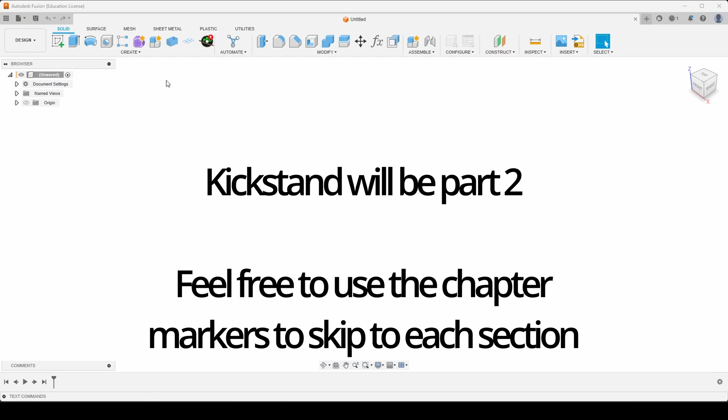Okay, let's see. Today we are going to design the base with the integrated kickstand and the sawtooth hanger and standoffs for the floating logo sign. This will be video 1, and from then you will have the base that you can save as a master file and just continue to use this base for every design that you do for the different logos.

So we've got Fusion 360 open, and we will start with the same two things you always start with. We'll go ahead and save it. I've got a floating logo sign location already set up, so I will do base tutorial, save, and I'll go ahead and create a component. Component will be the base. There will be two components. We'll have a base, and then we will have a kickstand.

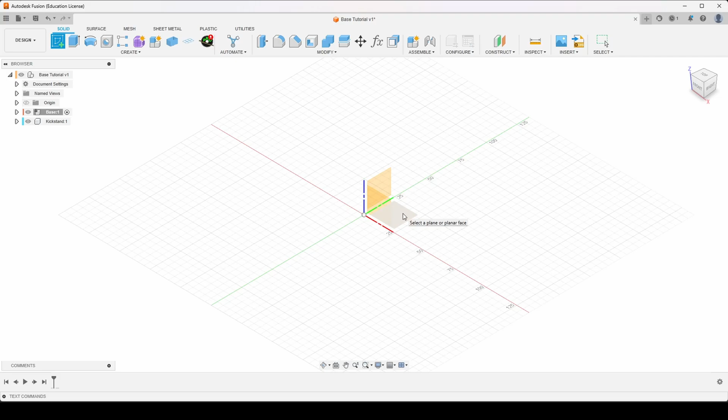All right. We'll activate the base, start from there. We'll create a new sketch on the top plane. We'll do a center rectangle. I have reassigned my shortcut R to center rectangle because I use that much more frequently. And actually, before we create any geometry, let's go ahead and set up some parameters. This is very important that we do,

so that if you have an odd size logo that needs to fit on a different size base, you can always adjust this base accordingly. And everything will be parametric. So the kickstand, the dimensions, the offsets, everything will adjust accordingly whenever you adjust the overall dimensions. So we're just going to worry about two for right now, because those are the two that you're going to adjust in the future. Everything else is going to remain the same.

We'll do base height. Right now we'll say 200 millimeters. My 3D printer bed size is 256 by 256, and I found that the 200 millimeter size for the base is a really nice standard size. And we'll do base width, 200 millimeters. Okay, so we have those parameters set up.

We'll hit OK. Again, this tutorial is presented with the idea that you already have a ground level framework of how Fusion 360 works. So it may go a little fast, but this is not a complete beginner's tutorial. You can find many of those on YouTube.

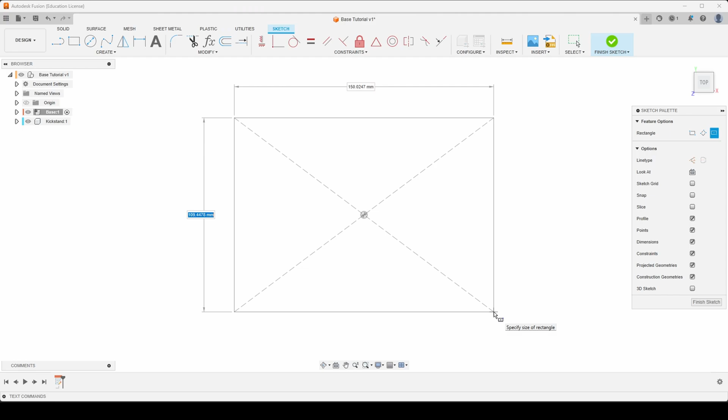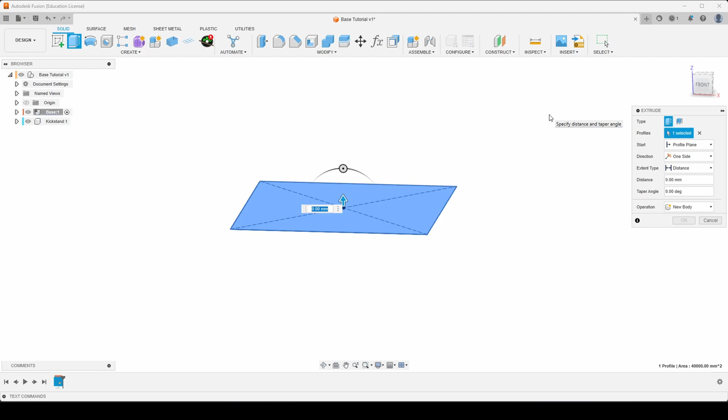So we've got the parameters set up, and again, I will hit R for rectangle, center rectangle in my case, and we will do height and tab over to width and enter. Roll out a bit, and there we go. Now we will extrude, and the base thickness is going to be 15 millimeters. Hit OK, leave that as a new body since it's already on its own component. So that is the front, and that's generally what it's going to look like.

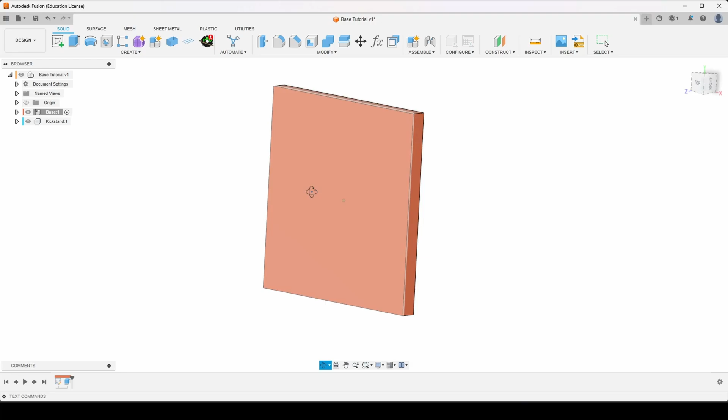Again, I've designed this before, so I'm going to go ahead and add the chamfers on the front. I always recommend that you wait to add any kind of chamfers or roundovers until the very end. But since I already have an idea of what this design looks like, I'm just going to go ahead and do it. So we'll hit chamfer. We'll just select this face, and that will chamfer all 4 edges. And that chamfer is going to be 6 millimeters. Right. So that's good.

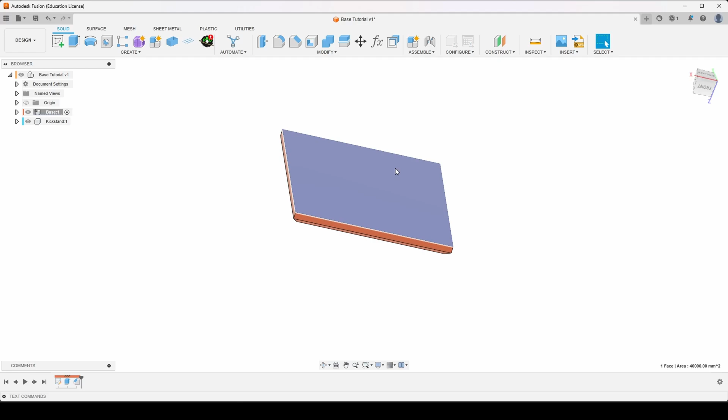And we will flip that around to the back. We will add another sketch. Now, what we're going to do is add the standoffs. We'll do C for circle. Add a circle, doesn't matter. Then we're going to dimension this circle. And our standoff diameter is going to be 10 millimeters. Okay.

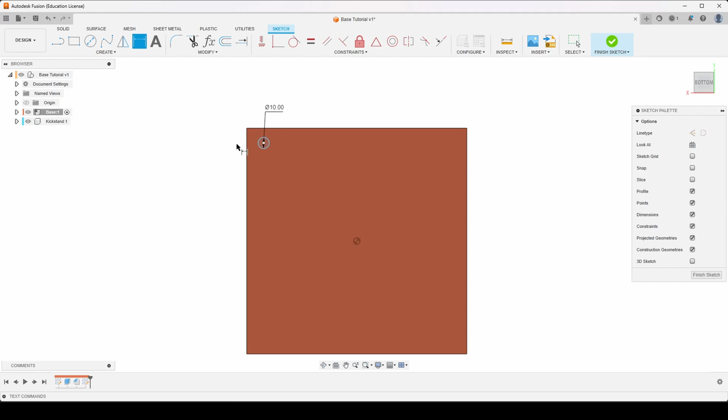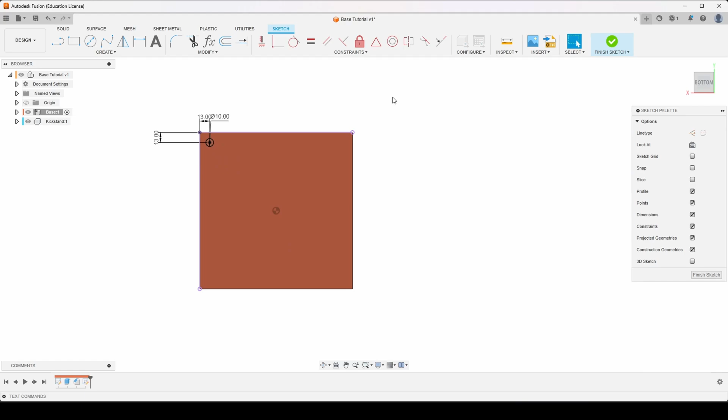Now, we're going to stay in dimensioning. We will dimension these from the edge. And we will say 13 millimeters from the edge. We will do the same from the other edge. 13. Perfect. Right. Now, we'll go ahead and extrude those. Those bumpers are going to go out 6 millimeters. They're going to have a negative 10-degree taper. We're just doing one right now because we will just mirror that to the other side.

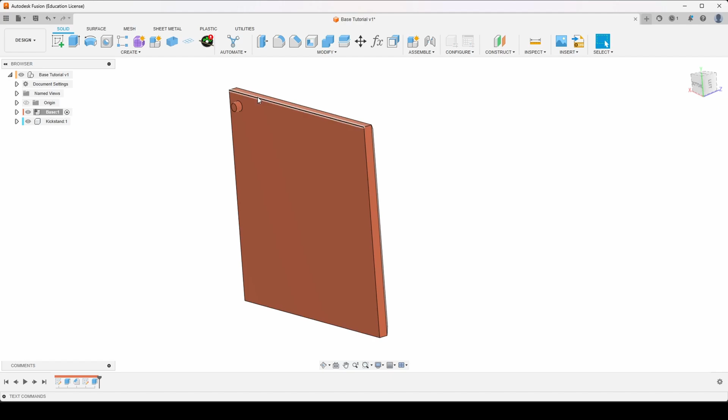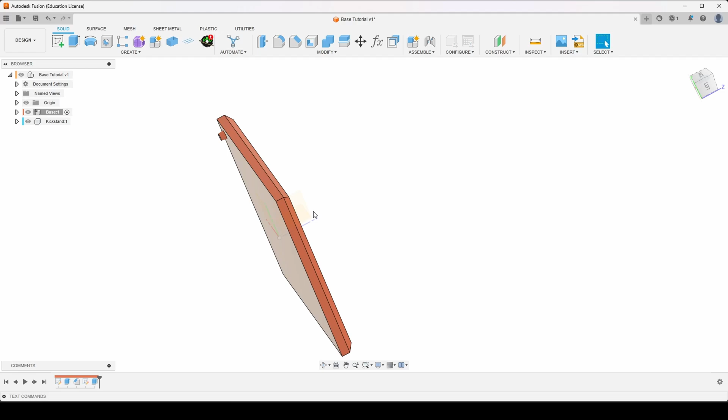So again, since I created the base using a center rectangle, we can use the origin for any mirroring operations. Always pay attention, especially when you're using parameters and you're expecting change in the future, keep the change in mind as you're designing. Parameters make things a lot easier to update in the future, but they make things much more complex during the modeling stage because you really have to think about how this is going to be updated. What kind of changes are you going to make that could break those parameters down the line?

So again, I always try to create center rectangles because then I can continue to use the origin to do any mirroring, and that generally keeps everything correct down the road whenever we change the size. And you'll see what I mean in just a second.

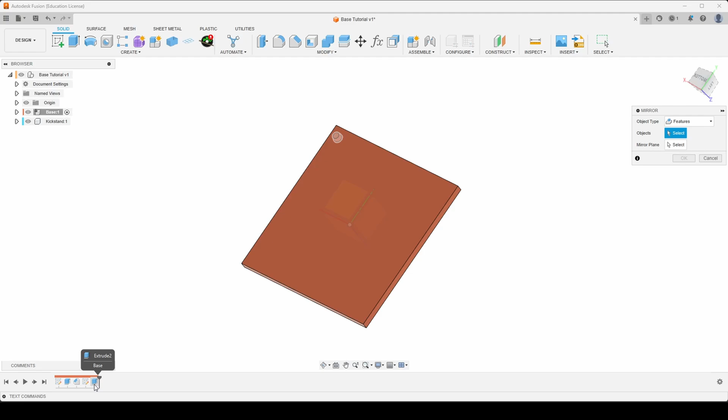So let's go to mirror. We're going to mirror a feature. That feature is going to be this extrusion, and I always select it from the timeline. That way I know for sure that I'm getting the exact feature that I want to get. Mirror plane, again, we are going to use the origin. And then we'll use optimized because that's a little bit faster on your processor.

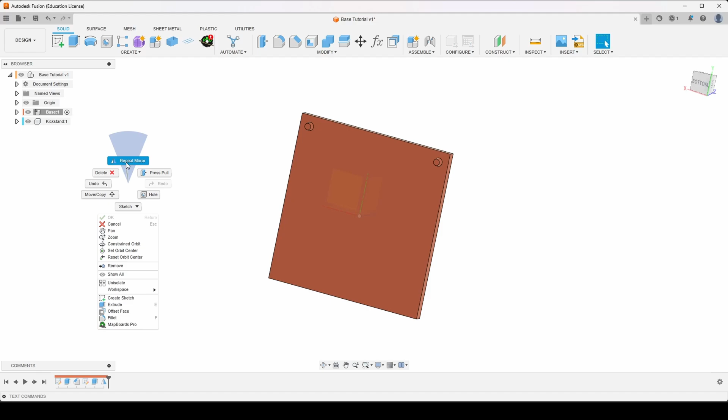And okay. And then we will right click, go up to repeat mirror. And then we'll stay with features. We can do this mirror. And then we can also do the original one. This time the mirror plane. Do that guy and optimized.

Okay. There we go. Now, another thing I recommend if you're doing a parametric design is constantly update your parameters throughout your design. This will keep you in check and make sure that you don't get 2 hours into a design and then realize that your design's going to break every time you update a parameter. And then you have to go back and kind of do some detective work to realize where your error is.

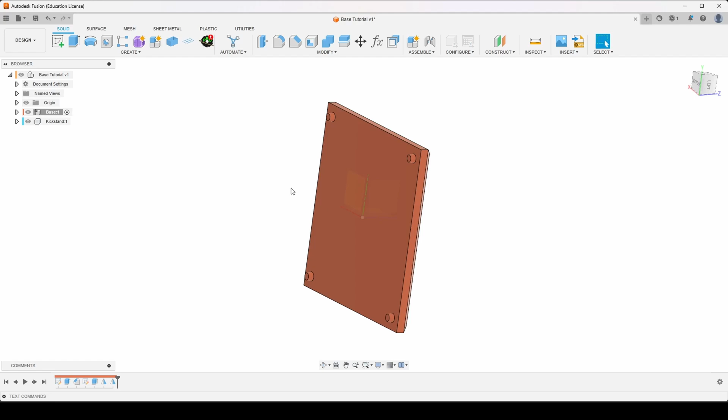So again, I have my hotkey as W for parameters because I use it so often. We'll move this guy over there and let's adjust the height. We'll say 150. Okay, that looks good. And then this one, let's just say 100.

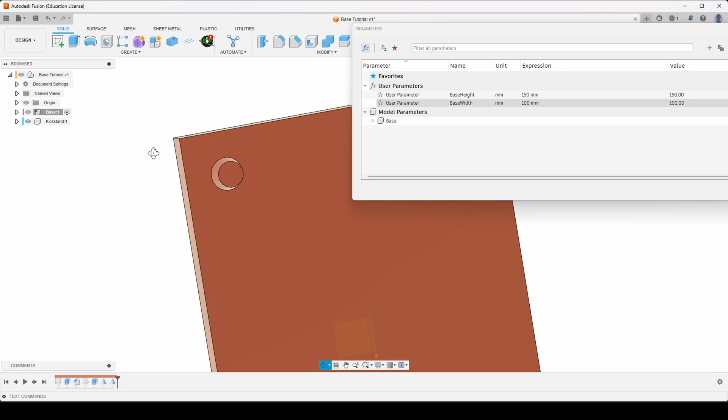All right, perfect. So it still maintains that edge distance and spacing from the edges. And again, because we use the center rectangle, we can always use this origin point to do our mirroring. The origin is never going to change. So it's a real safe way to do a design.

Okay. I'm going to revert these back to 200. Again, 200 is going to be the largest that I'm ever going to print this, right? I'm not worried about going up to 300. Again, everything should work fine, right? But as long as it works at 200 and below. And there's always going to be, especially with this kind of design, a point in which the design breaks.

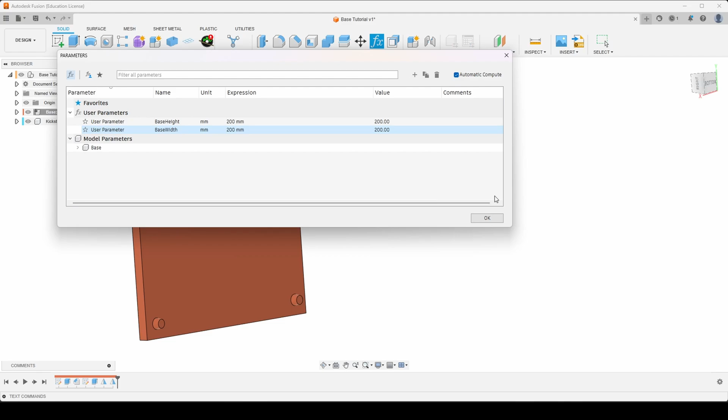Because let's say you adjust the height from 200 down to 40, right? Obviously, this kickstand is not going to be able to work with such a short sign. So just keep that in mind. You know, again, all of the designs that I've done, if there is a short and fat logo, it's generally going to be 120 millimeters or so just to keep that ratio correct for the logo. So 9 times out of 10, it works. So we're back there, we'll hit OK, and back to the design.

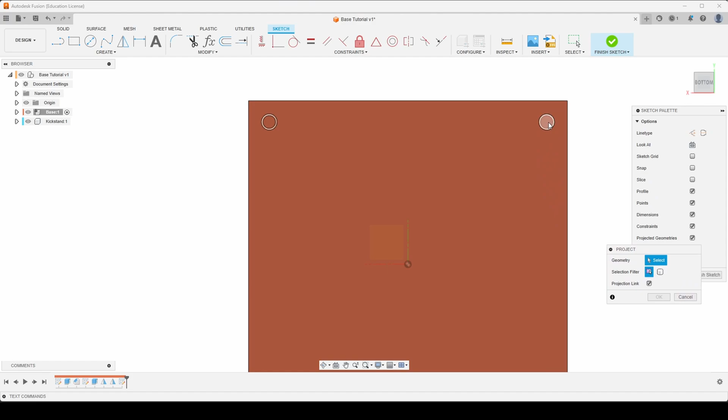So I'm going to add a new sketch to the back face. And let's do a slot, center to center slot. Actually, let's project first. So P for project. This will give us some geometry that we can use. Actually, I'm just going to select this whole thing. It gives us some geometry to work off of. Now we go back and we do our slot, center to center. It'll align us with some of the center points, which makes life a lot easier.

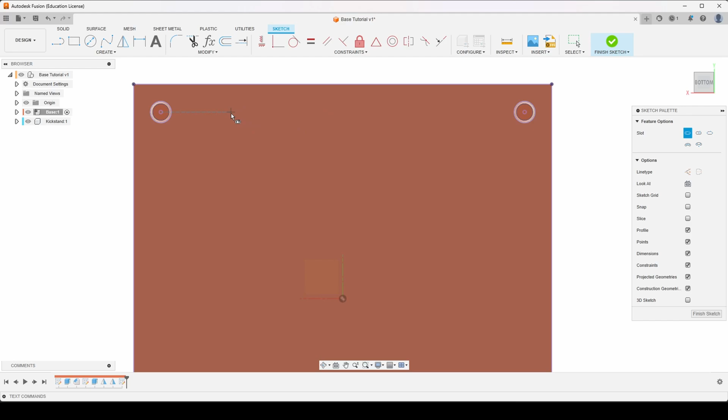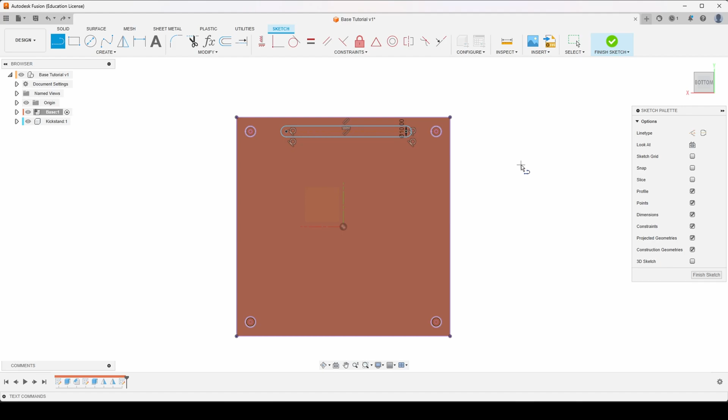So we'll just go there to there. And let's just do 10 millimeters. Good. Okay, let's add, we'll go L for line. Then we're going to press X to make that a construction line.

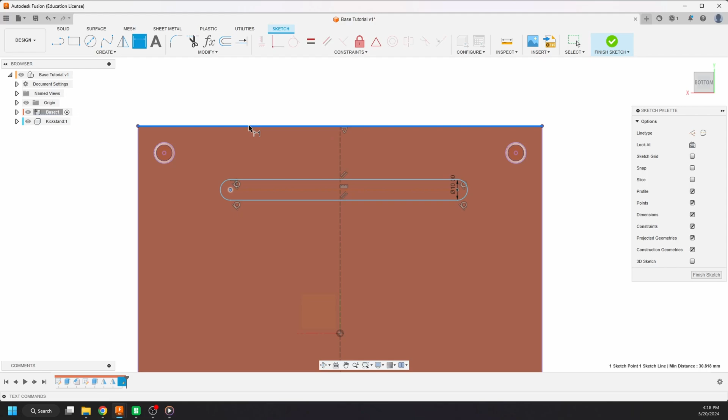We'll go to the midpoint of here, just hover, and it will snap to that triangle, which is the midpoint. We'll just give ourselves a nice center line here. Yeah, we'll select that point there. And we'll hit D for dimension. And then this top area, we will put that at 13, just like the feet. That way it always maintains that 13 millimeter spacing, just like the feet.

In order to center it properly, we are going to take this line, and we want that line to be coincident. We're going to hold down Shift, and we're going to get to the center point of this one. You can see the X and then that midpoint icon show up. We'll click there. Now, this is locked into place, not moving anywhere.

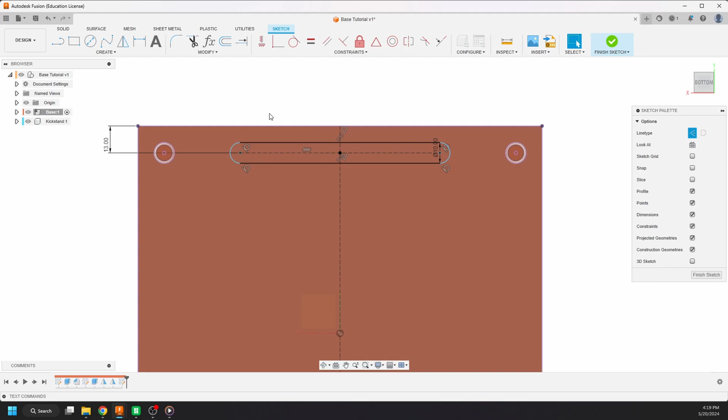These are still blue because we can still extend this. Now, when we set a dimension, again, this is why you always keep yourself in that mindset of parametric design. So we'll hit D for dimension. We'll say that that looks pretty good. I always like to round just because it helps me sleep at night. Do 100 millimeters. That looks great, right?

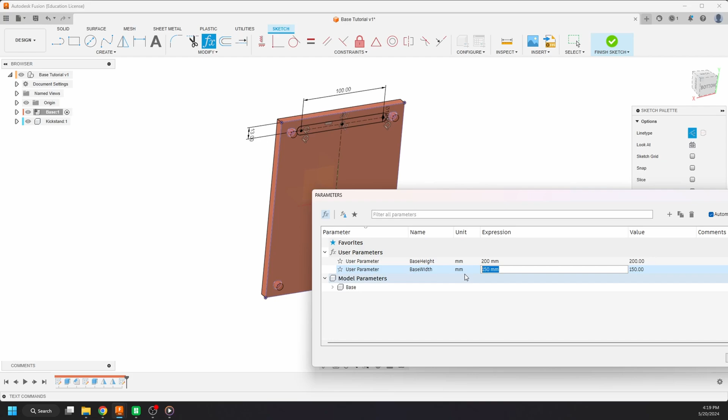The problem is, hit W. Let's say that we adjust our width. So we're going to adjust our width to 150. Okay, let's go a little bit more. So let's go down to 130. Now you can see it's overlapping our feet. So once we actually extrude and we have geometry here, that geometry is going to collide.

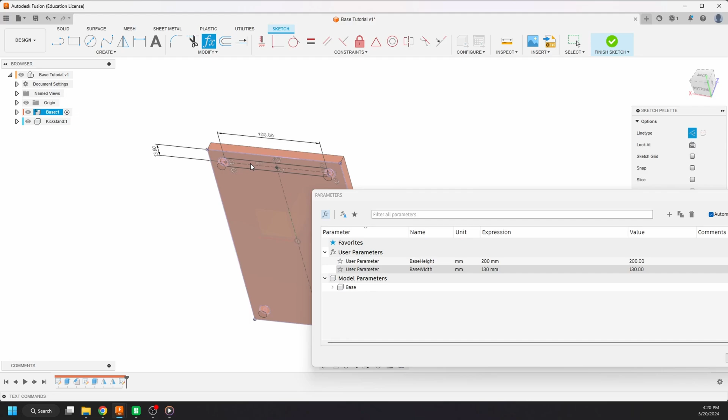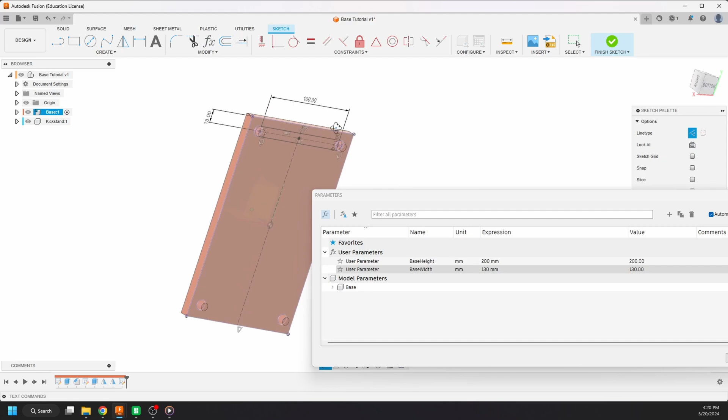So you need to think of all your features as how they're going to interact with the parametric nature of your design. If it doesn't need to, like the diameter of these feet, right? Those do not need to be parameters because I'm always going to be okay with this being 10 millimeters with that negative 10 degree taper. It's never going to change. However, the length of this sawtooth hanger does need to change according to the width of the sign. So we need to make sure that when that design feature exists, that it has corresponding parametric values.

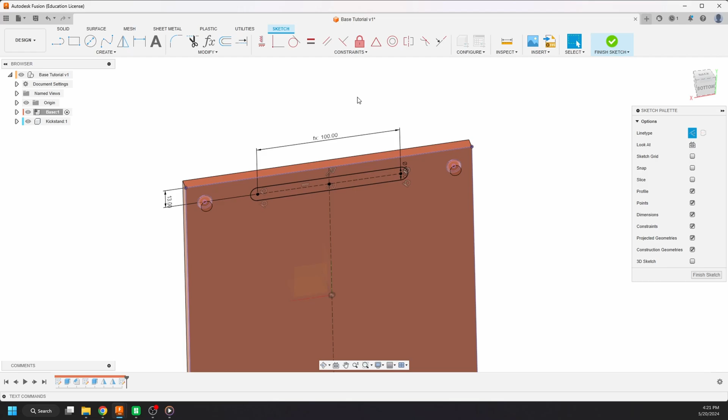So let's get this back to 200. Exit out of here. So now, in order to do that, it's pretty easy. You don't need to assign a parameter to it. We can go base width divided by 2. So now it's still 100 because our base width is 200 divided by 2. But now, whenever we hit W and go into our parameters, let's adjust it back down to 120. There we go. So now it's at 60. Now that geometry adjusts to our parametric values.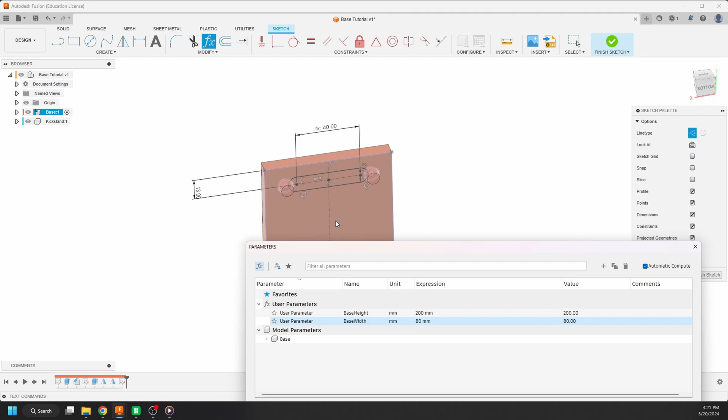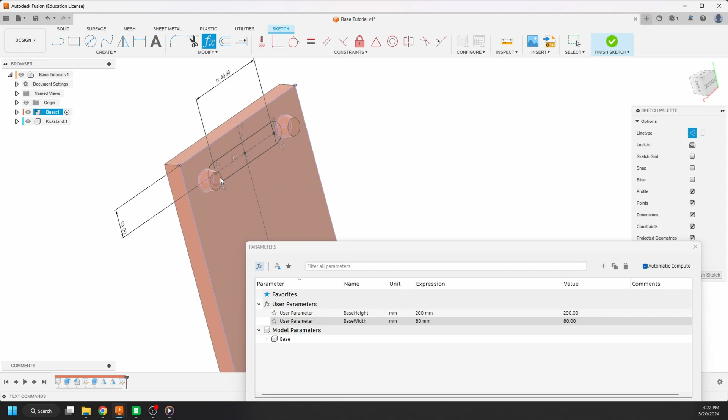We can take it all the way down. We can go to 80. See, 80 still works. It still adjusts it, but with such a small sign like that, because our edge distances are not parametric with the standoff feet, it will start to collide. But that's not the fault of this. That's the fault of us not assigning parameters to the edge distance on these. Again, I have never made one, and I never expect to make a sign that's this thin. So I'm gonna roll with it. I think this will work fine. Bring it back to 200, and we'll get out of here.

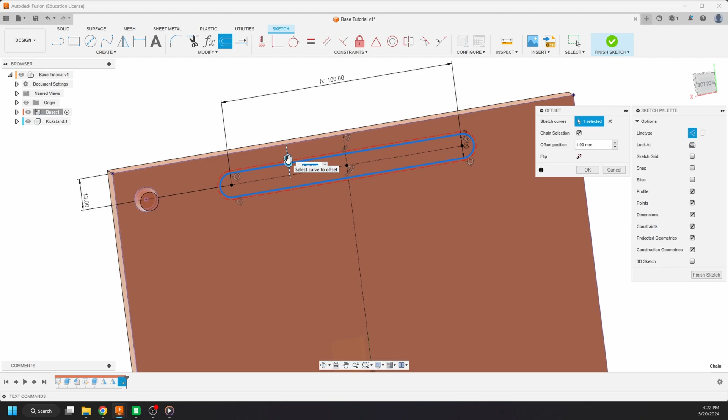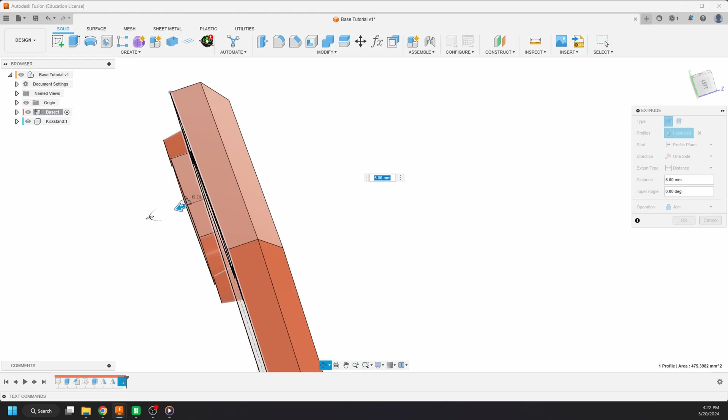Okay. So now let's go back into, actually we will select offset, then we will select this. Let's turn this off of construction so that we actually have selectable geometry. And then we can do a 2 millimeter distance there. Hit E for extrude, select that path, and then I'm just going to select the end of this. That way it extrudes the exact same distance as the standoff feet.

Actually, so that's 6 millimeters. I'm just going to do 5. So it's a little bit less. The standoff feet are there for a reason. That will give them space to do their jobs and actually offset this from the wall. Okay, we'll say okay.

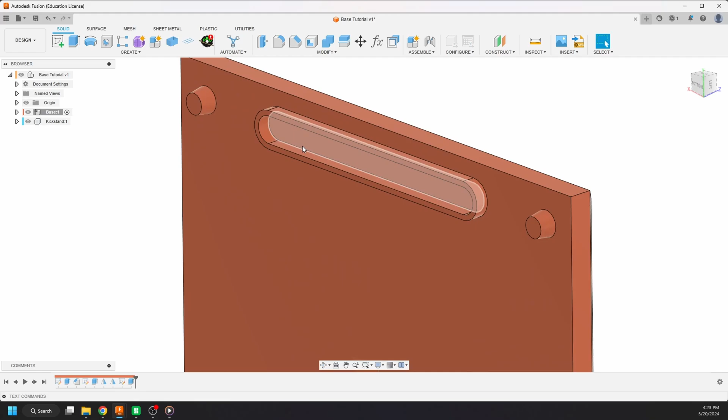Okay, let's go back into this sketch so we can add the retention features for the sawtooth hanger. We'll do a 2-point rectangle. Really doesn't matter. Go right there. Take this, and we want that to be coincident with, again, holding shift, finding the midpoint right there. Then we will dimension this 3 millimeters.

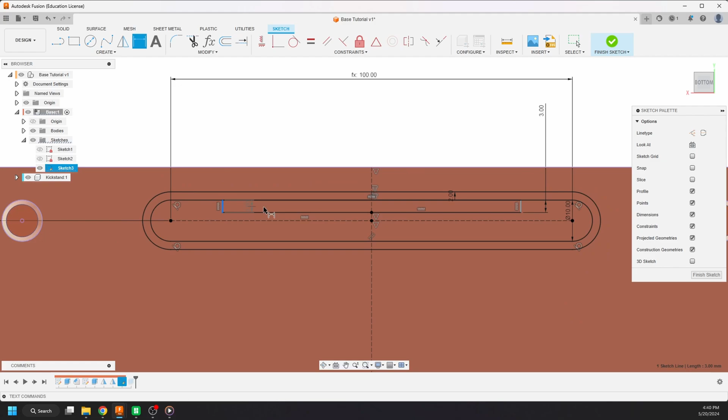Now, again, remembering what we said about parametric design, we're going to take this dimension and we are going to say this. We just click on that dimension, then it will give us D19, which will always input the dimension that is. So if I adjust the width of the base to be 100, this is going to turn into 50, which means that it's automatically going to put 50 here as this value. So we'll say that divided by, say, 2. That doesn't look long enough. Let's do 1.5. Yeah, 1.5 looks good.

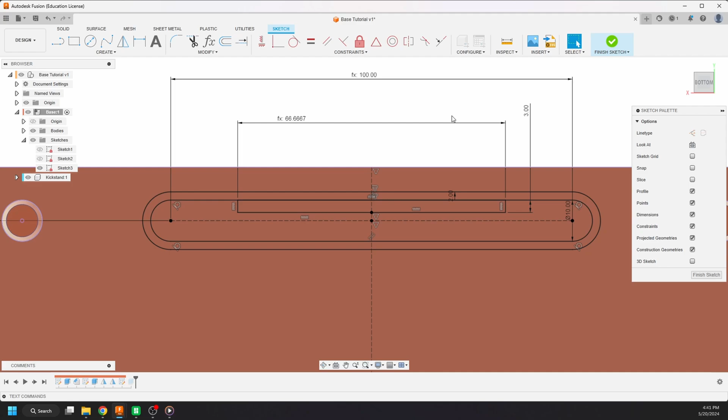All right. We're going to select that rectangle, mirror. We'll mirror this center line. Oh, sorry. There we go. Select there. Select mirror line. And then click that one. Okay. Now we will finish there. Let's turn that sketch back on.

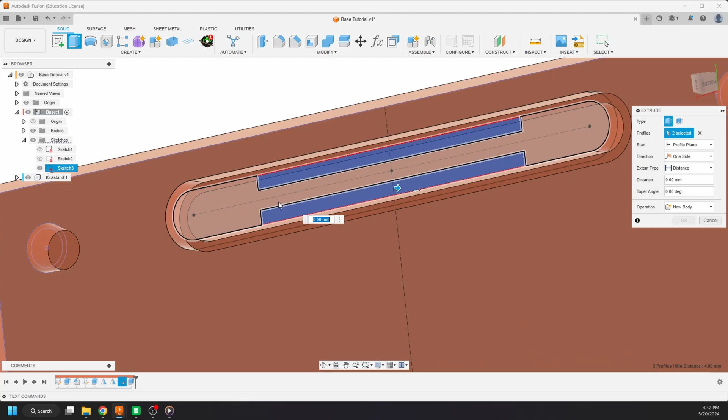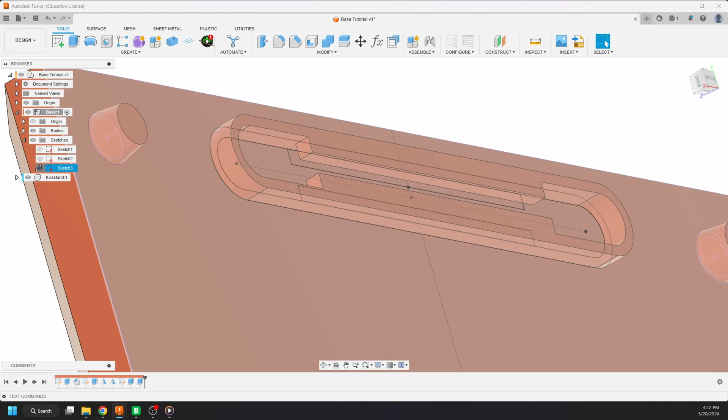E for extrude. We're going to take both of these. We are going to, instead of starting from the profile plane, we are going to start from an object. So we're going to start from the top of this. And then we are going to extrude in, yeah, we'll say 3 millimeters. That looks fine. Okay, let's turn off the sketch. That looks good.

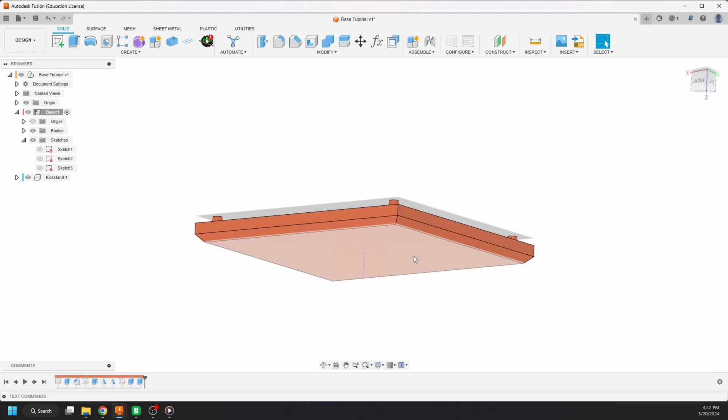It's a little chunky right now, but again, think of the way that this is going to be printed, right? The entire intent of this whole design is that all front showing faces have the nice texture of the textured bed on the 3D printer. So this is going to be printed face down just like this. So we want to make sure that any geometry that we have up here is not going to be floating in the air like it is currently. But we're not worried about that right now because we are going to be adding chamfers to make sure that everything is at the 45 degree.

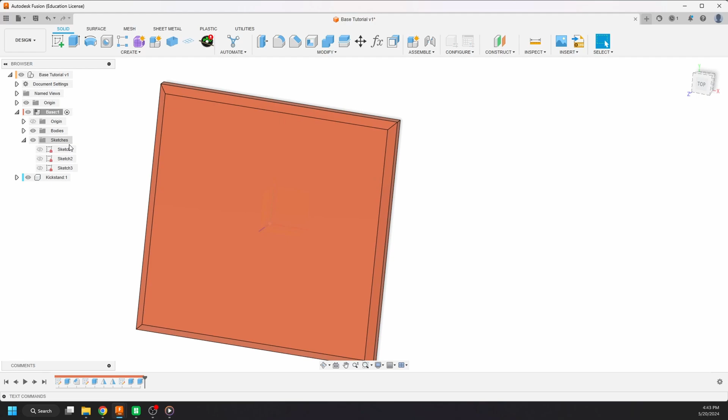So let's see. Let's do some good practice here. I'm not teaching the right thing here, so let's name our sketches. So this is going to be base profile. It's going to be... Standoff feet. And this one is going to be sawtooth hanger. All right.

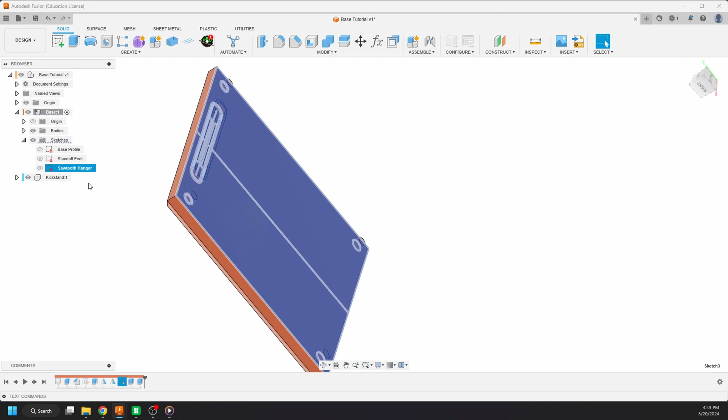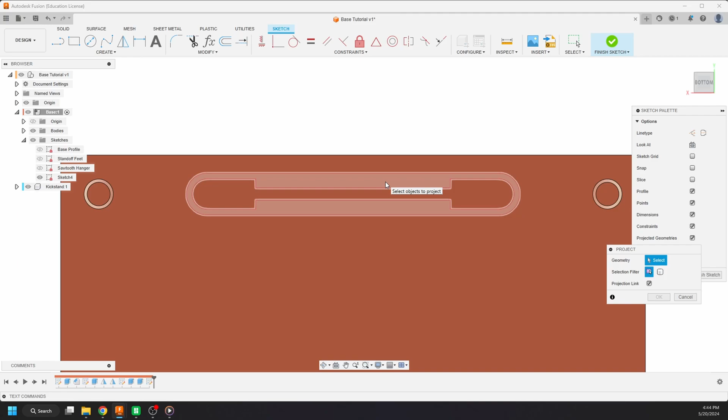Now we are going to create another sketch on top of this sawtooth hanger. Again, I have my settings to where everything doesn't automatically project, because a lot of times it's more annoying to me than it is helpful. So we're going to project this so that we can work off of the geometry. Because again, if we're trying to sketch on something like this, if we don't have it projected, it's not going to pick up any of that geometry.

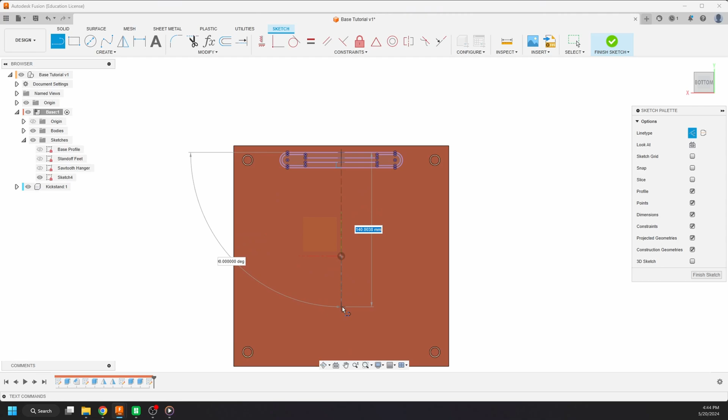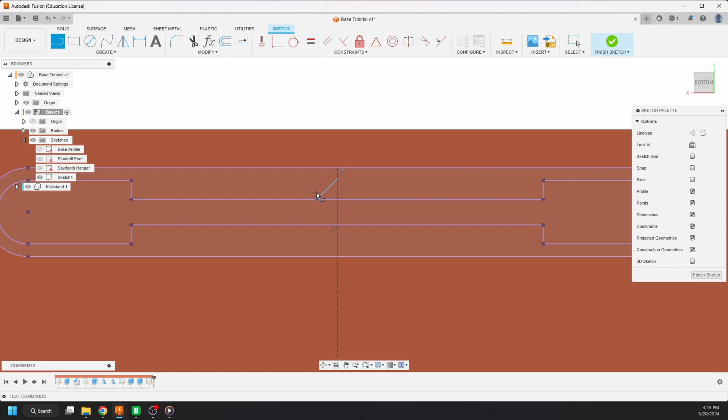So again, with this one, we are going to go line. We're going to do a construction line. Let's find the midpoint here. And we'll just bring that down just so that we have a defined midpoint. Now we can just take a line. Ooh, let's turn that off of construction. Like that. And we'll bring that down. Select both of those, equal. That way they are the same length. You can apply, say 5. Go.

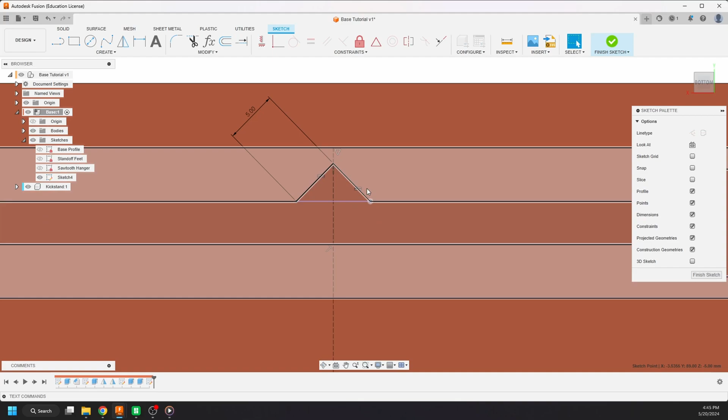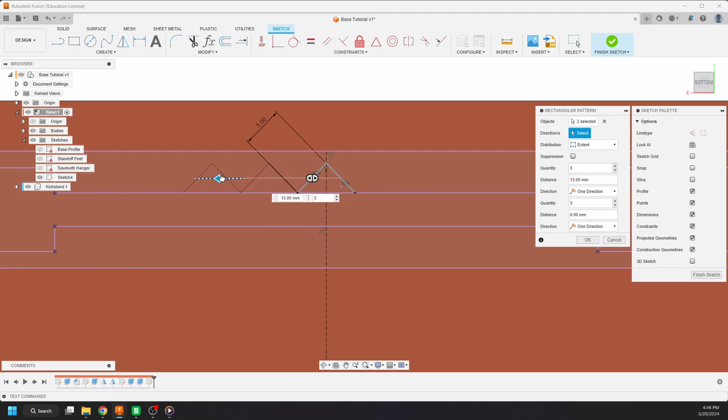Now, trying to figure out what is underdefined here because it's still blue. It's not black, so it's not fully defined. But I'm not going to worry about it right now. I am going to do a rectangular pattern. Select this and that. Directions go that way, just like that. We're going to go in symmetrical directions. Bring it back to where it's lined up. And do spacing. There we go. So now we can up it.

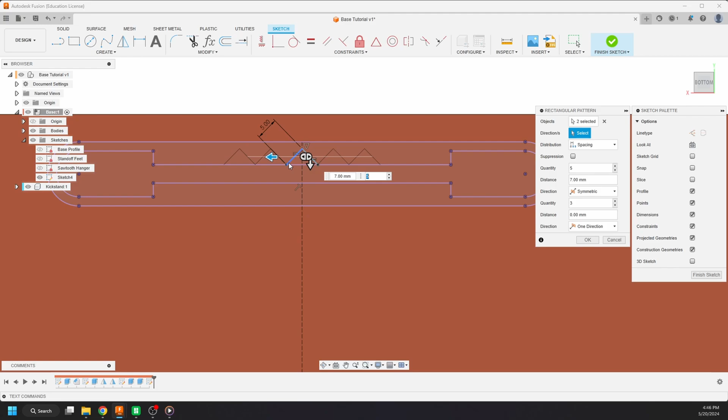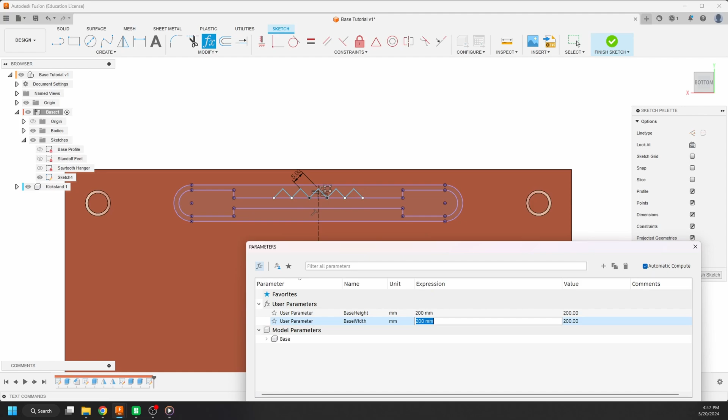We'll say 5. Chances are anytime you hang this thing, you're just going to hang it on the center one, so this is probably way over engineered anyway. So let's just go with 5 because I'm not going to put in parametric values here. And then again, let's test often. So let's bring this width down to the lowest that I think is ever going to happen, like 130. Design still works. All 5 of those still fit within there. So I'm good with that. Bring this back to 200. Exit out of there. Okay.

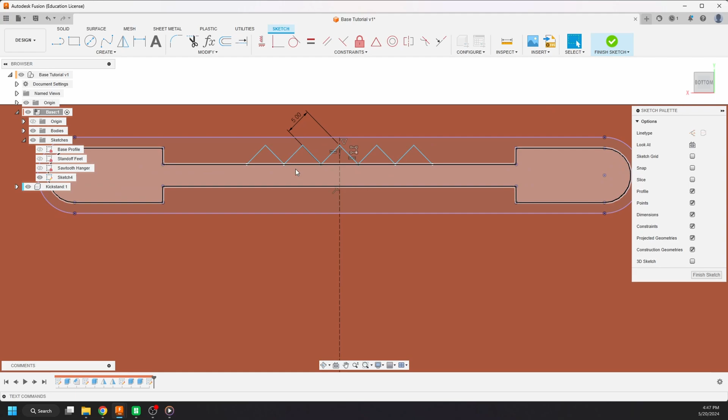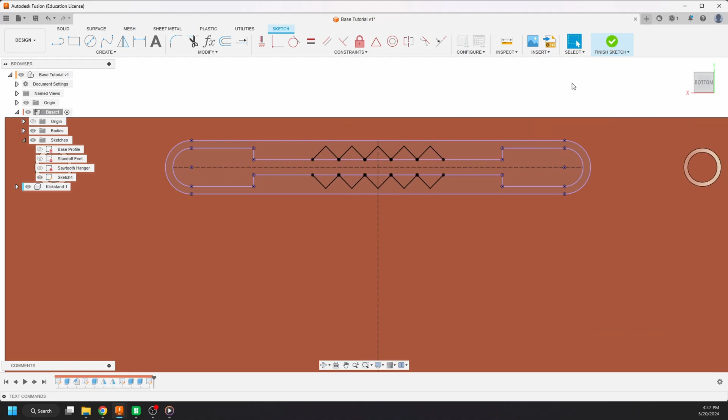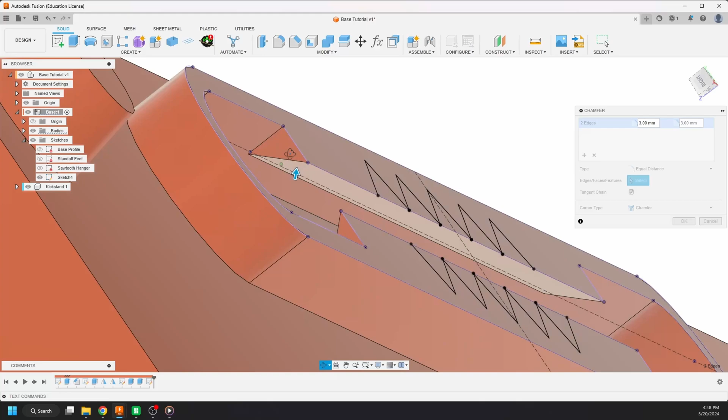Now we can do another line with construction. Do the midpoint there. Then we can do another mirror. Hold down Control, select all of these. Mirror line there. Okay. And we'll finish the sketch. Now they're fully defined. Actually, what we'll do first is we will chamfer, select this edge and this edge, and let's chamfer those just like that. And now you can see what I'm talking about. We're going to print from this orientation. So when this is printing, it's at a 45-degree angle, so it will not need any supports and should print just fine.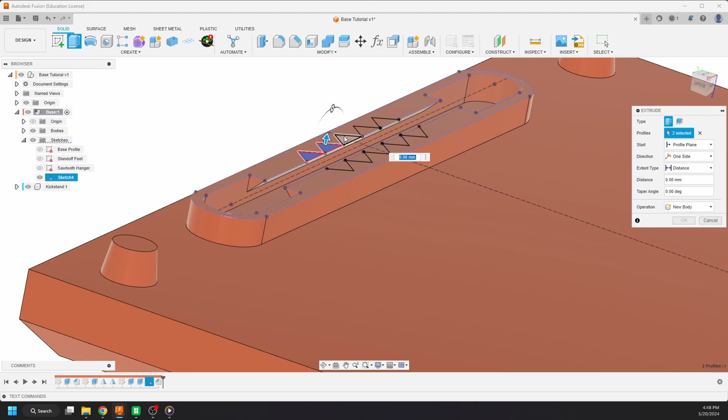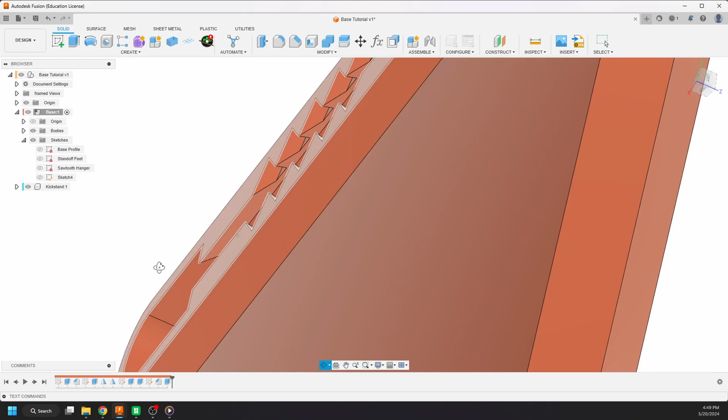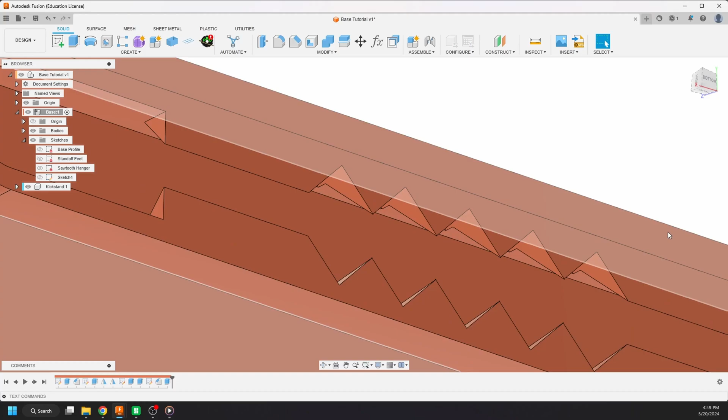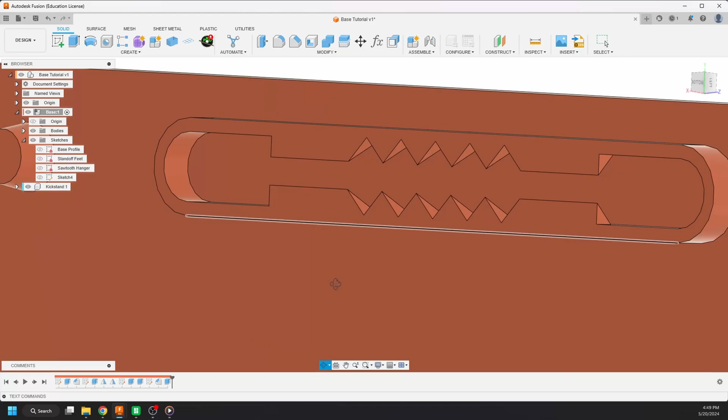Hit OK. Now we'll hit extrude, select all of our saw teeth cutouts. We'll extrude those down, and we'll just go to that face. Hit cut. Okay. Now, the reason it did not extrude all the way through, it may have been my selection. So let's open that one back up. Bring it down a bit more. 4 millimeters. Still did not go all the way. I don't have the right view here. Five millimeters. Oh, I see. Okay. Well, that should work just fine. It's going to work exactly how we need it to work.

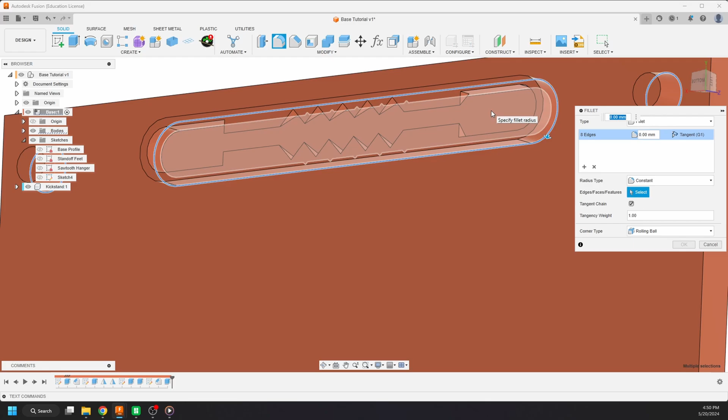Now, let's just come back here before we get started on the kickstand, and we'll just do some cleanup, some nice to haves. So we'll take that, select all these edges. We'll put a slight round over those, and I think that'll be fine. Everything else looks pretty good. Okay, now next step is going to be the integrated kickstand.